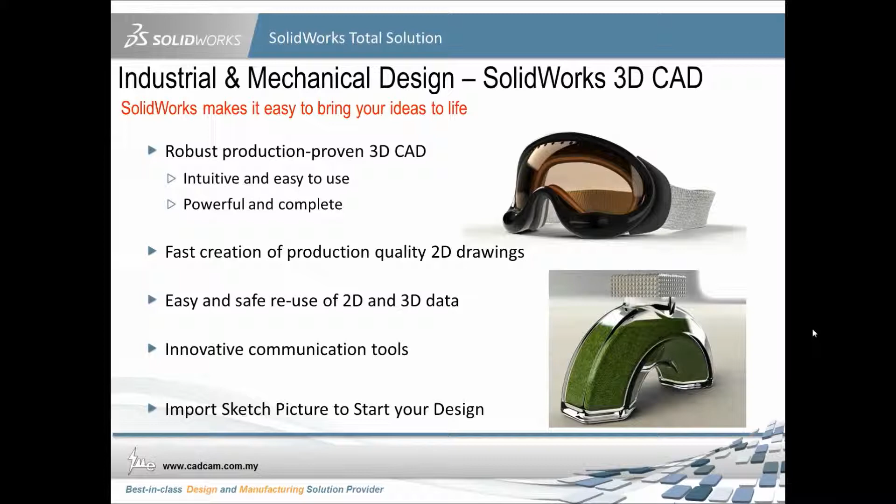Here are a few slides to show you what kind of capabilities Solidworks solutions in 3D modeling can help you with. First of all, interoperability. It enables you to read in sketch pictures like JPEGs and other kinds of file formats, and it's also compatible with Adobe Illustrator. You can import these pictures into the Solidworks interface and start doing surface modeling or even solid modeling.

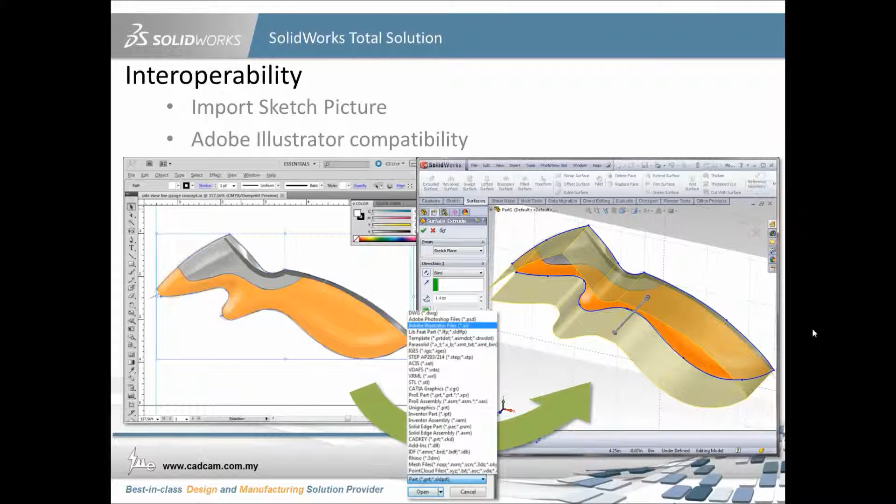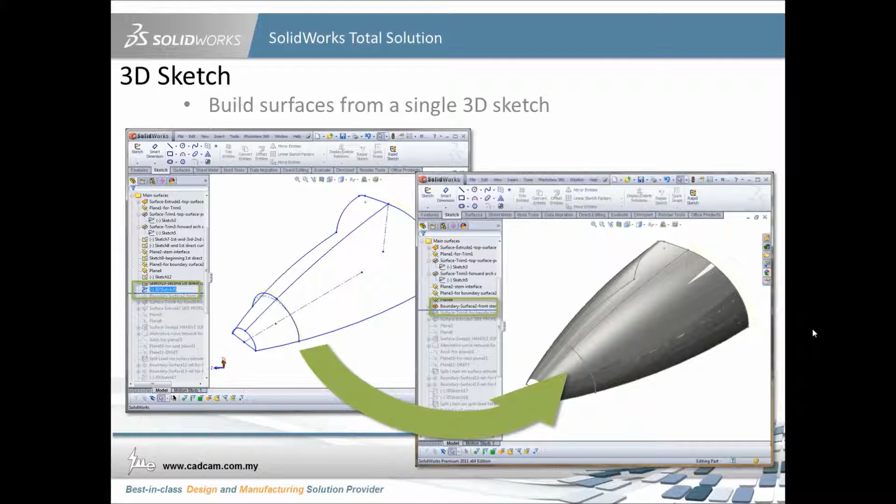If let's say you don't have sketch pictures, you can also build up your own sketches, and even use 3D sketching to build the surface from a single sketch.

SolidWorks software also includes curvature checking tools, which are curve continuity checking tools, to ensure all your surfacing has C2 matching on the surface features.

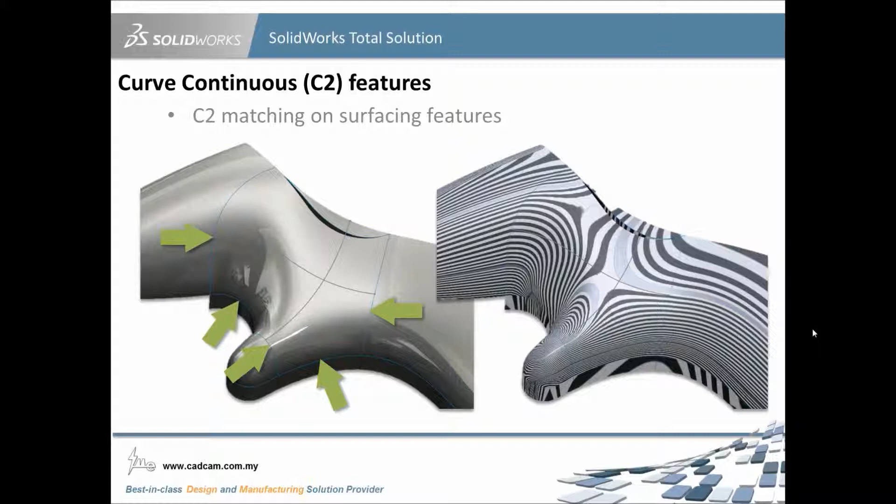Here you are with an extensive set of advanced modeling tools and features to produce very complex or even nice free-forming surfaces in your consumer products.

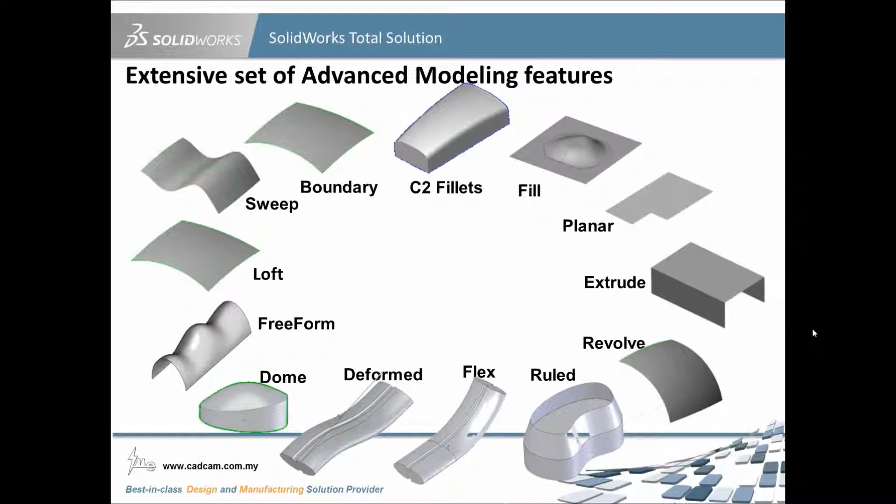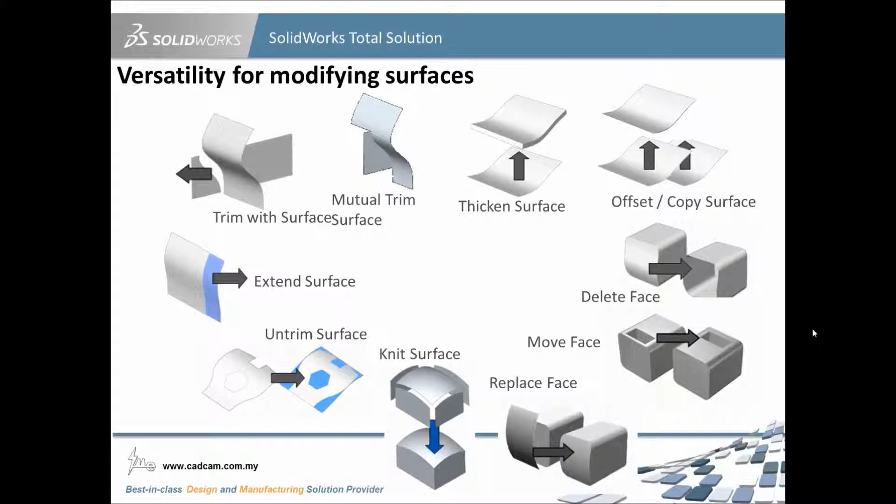Apart from that, the surfacing can also be modified by versatile surface tools, whereby you can import existing models from solid modeling and modify them to become a new product.

SolidWorks enables hybrid solid and surface modeling. You have the capabilities and abilities to form a surface body from a solid body and back to solid bodies in the same part file.

You don't require different kinds of interfaces or 3D platforms to generate the designs. This picture shows one of the samples where you can create model designs from a solid, delete a face to make it a surface, form another new surface, and knit all the surfaces back into solids.

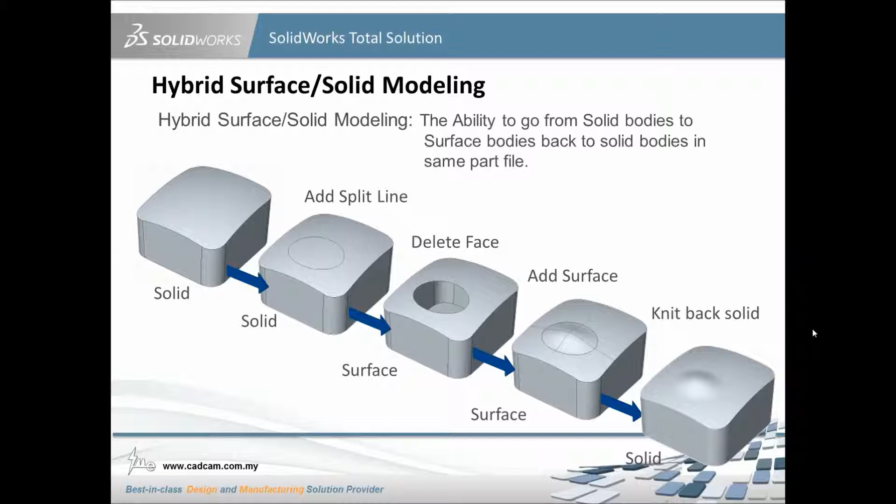By using multi-body and master bodies, SolidWorks offers you an environment to generate world-class hybrid modeling tools, making your design more flexible so you can work seamlessly between surfaces and solids.

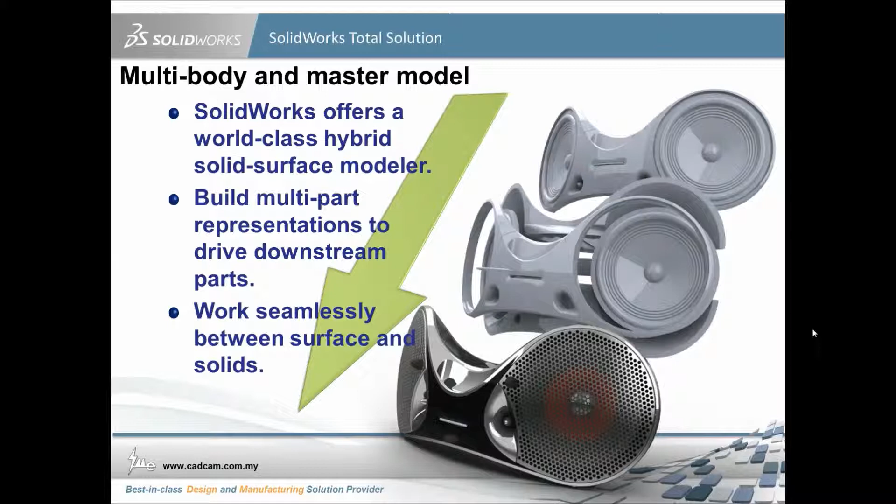You can even render your products to make them look like real-time realistic materials.

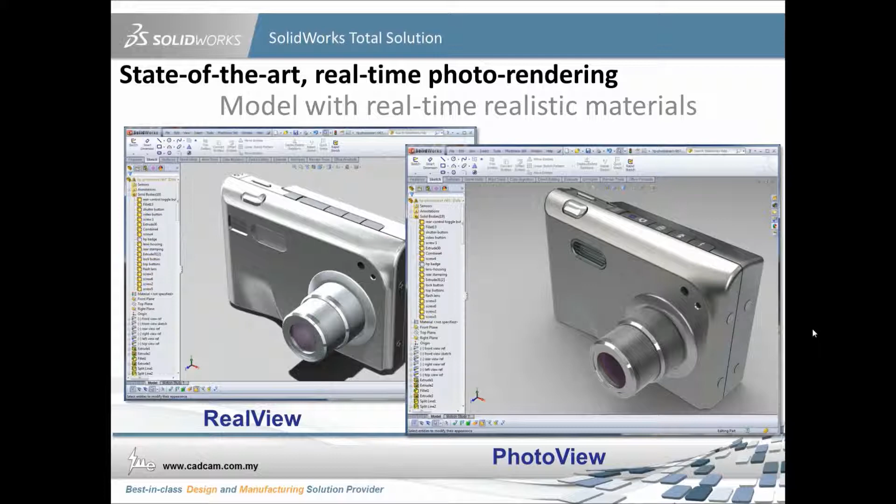Apart from 3D modeling, SolidWorks is also able to add simulation tools to do design validations. We want to make sure our first design is the best design.

The simulation tools enable designers and engineers to learn and use them to generate validations on our products, such as stress, pressure analysis, drop tests, fatigue, and non-linear analysis.

It can also use plastic injection analysis, SolidWorks Plastics, to check filling times, pressures, or detect possible risks of defects during the plastic injection process.

SolidWorks is also a pioneer in sustainability design, using life cycle assessment to check our products and how they affect our environment.

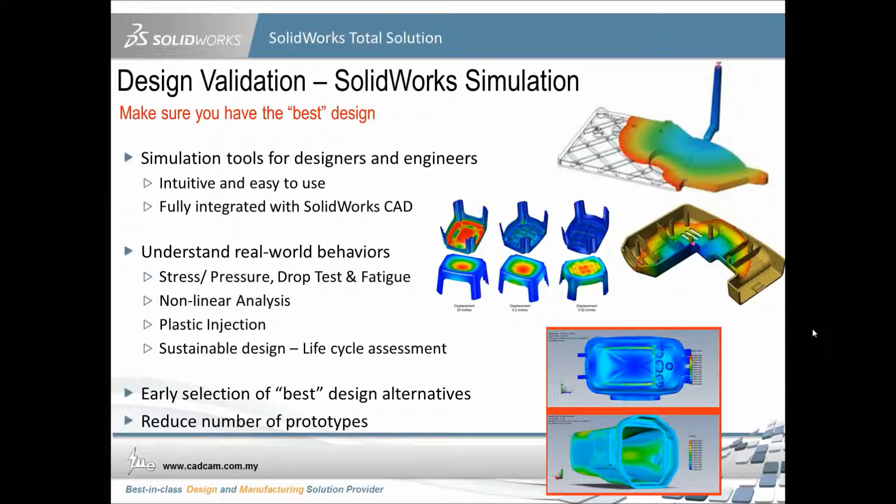We want to make early decisions to check design alternatives. It helps us reduce the number of prototypes, and it helps our company save costs.

Improving our communication from design to manufacturing is very important by using certain tools, especially when we have a language barrier with our shop floor workers, or geographical obstacles with our customers or suppliers.

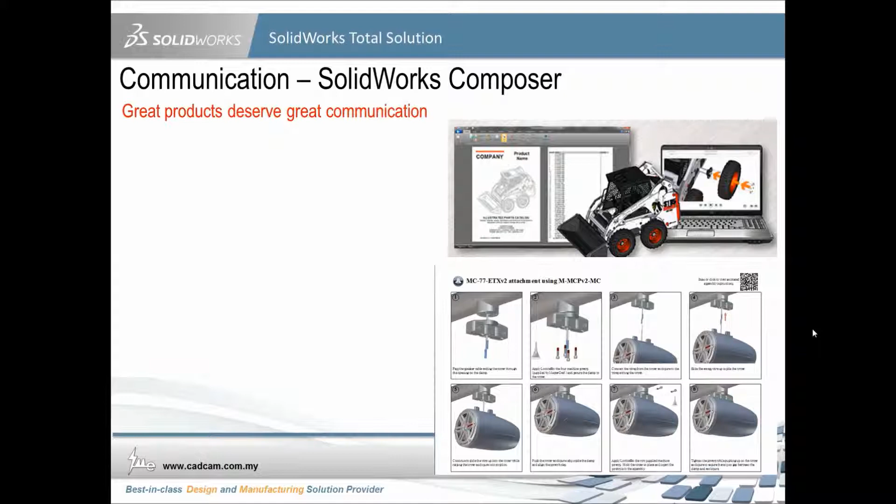SolidWorks Composer is a tool to help you create great product communications, such as technical documentation and marketing collaterals, with very stunning graphical content for all these technical communications.

You can reuse all the SolidWorks 3D design data to generate these technical documentations. It can be used by non-CAD users; it's not necessary that you have an engineering background.

It eliminates the need to redraw or take photographs. It saves your time by starting technical communication earlier and improves the quality of product deliverables.

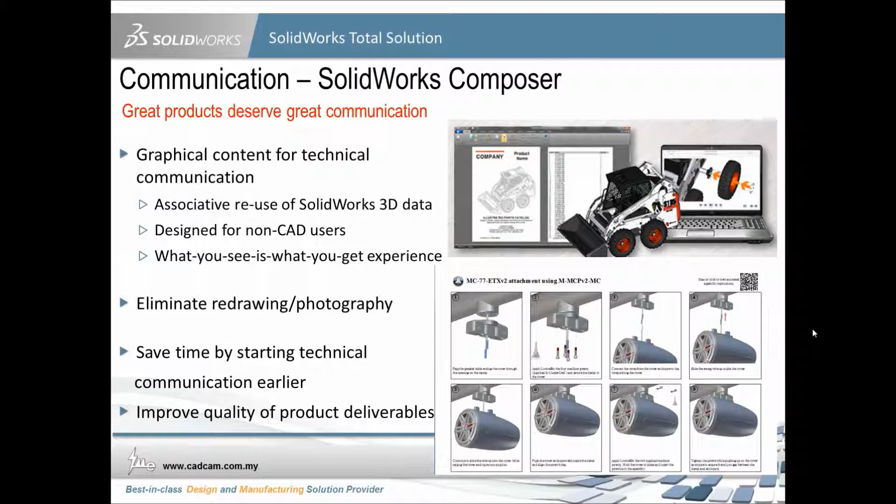This is a sample of the software showing how you reuse SolidWorks 3D content data, read it into SolidWorks Composer, and generate stunning graphics, which you can output as videos, 2D PDFs, images, and so on.

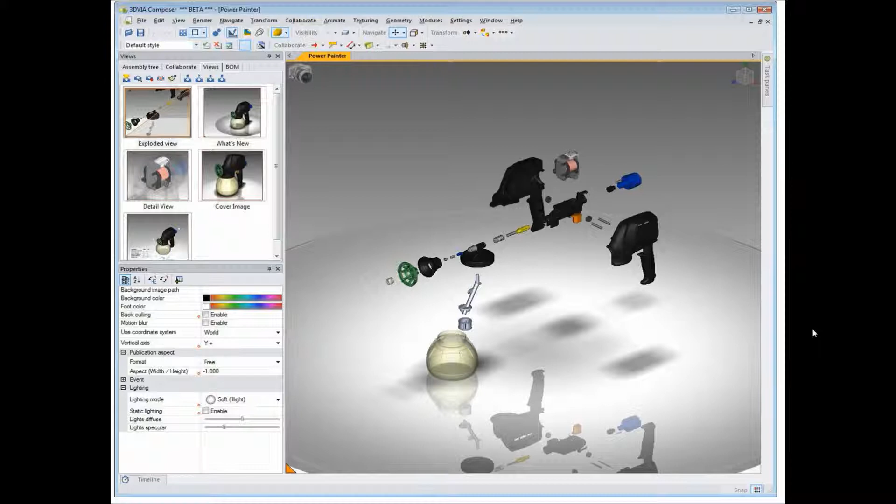With all kinds of data in your hands, from design to analysis, and even generating technical documentation, managing them is one of the challenges as well, because we want to make sure the right data goes to the right person at the right time.

It's easy to use because it's integrated with Windows Explorer. It helps you improve the process and communication through digital approval workflows.

Once you have the database, it helps you have fast searching capabilities for design reuse purposes and fast reporting. Last but not least, it can help your team grow faster and make sure there are no errors by using revision and history controls.

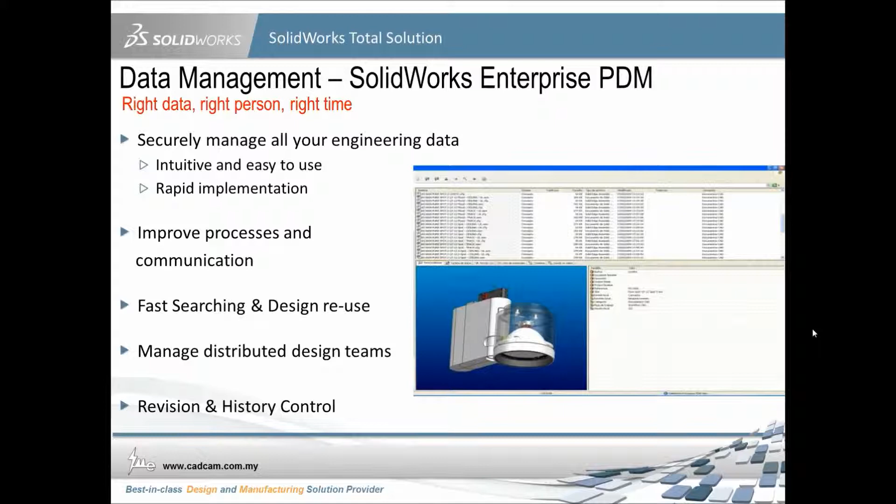Let's have a look at these videos to understand more how SolidWorks can help you in design.

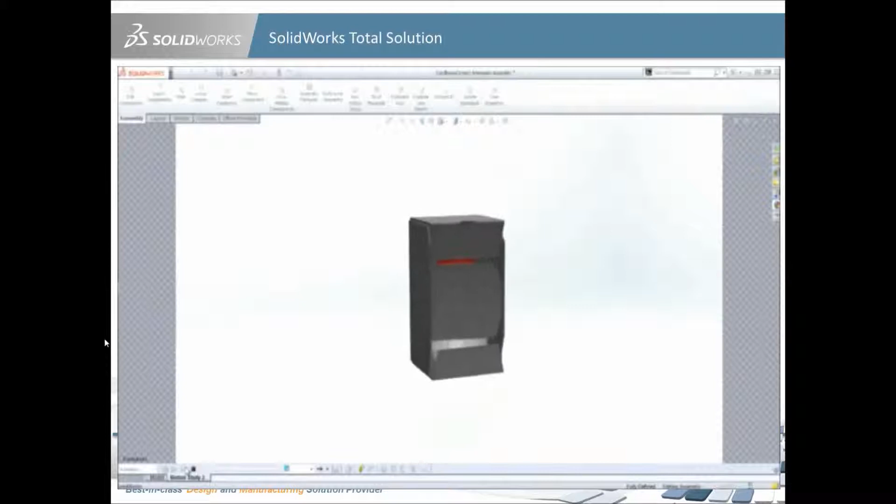SolidWorks lets you more easily sell your product vision to your clients by visually presenting your designs earlier in the design process. Show your clients how it will look and how it will work. This gives your customer confidence in the finished product well before any manufacturing takes place.

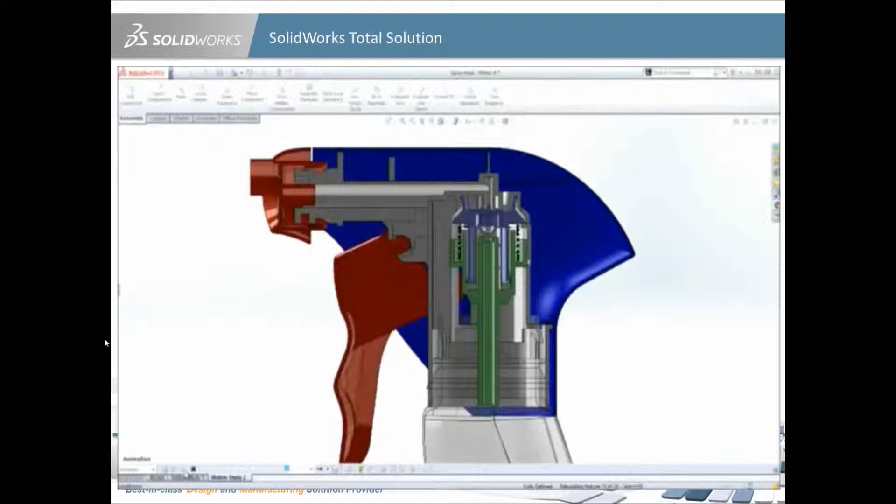Additionally, early design visualization minimizes the effects of consumer-driven design changes on costs and timeframes. SolidWorks empowers you not only to show your products in their best light, but also to ensure that parts fit together the first time. Packaging designs typically start with concept sketches.

SolidWorks enables you to reuse these sketches, quickly capture designs, and turn them into 3D models in no time at all. Design changes are effortless and instantaneous when you use SolidWorks, so you can deliver the final product faster.

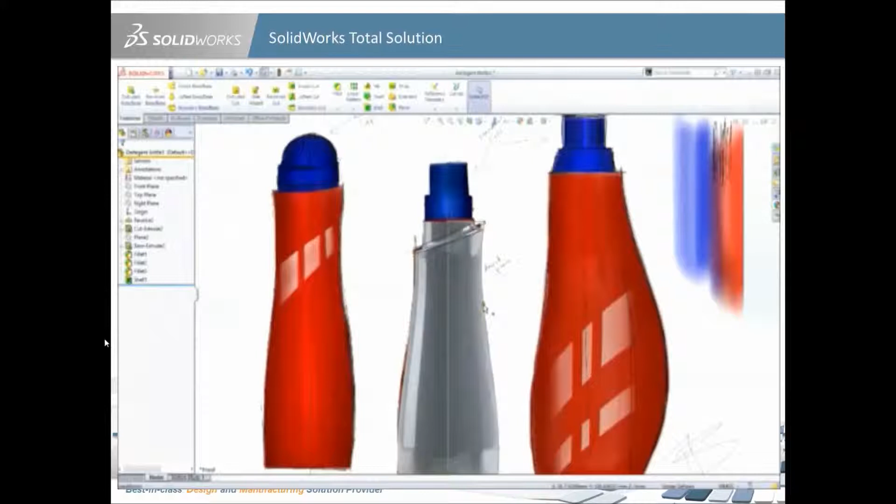The shapes and surfaces of consumer packaged goods contribute significantly to buyer appeal. For more complex shapes, SolidWorks provides high-end surfacing and shape creation capabilities that are as easy to use as they are sophisticated.

Tools such as Loft and Sweep handle most shape creation. But for more complex freeform styling, SolidWorks lets you simply push and pull surfaces to achieve the shapes you're looking for.

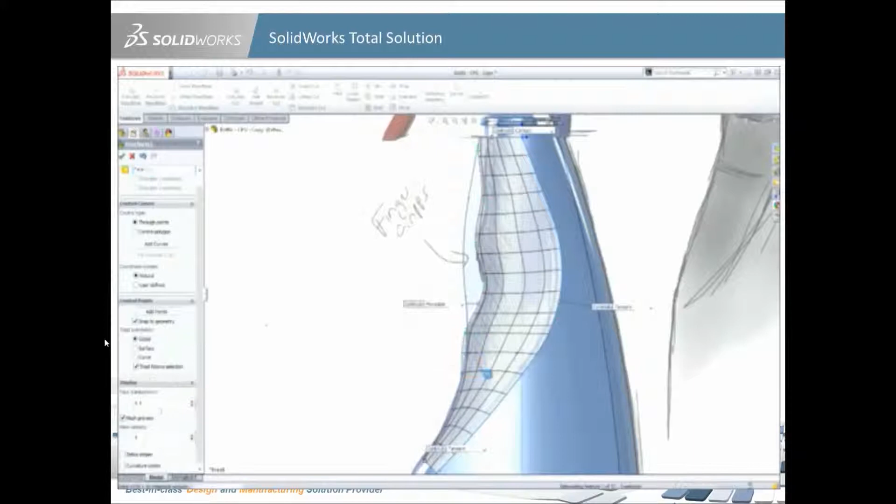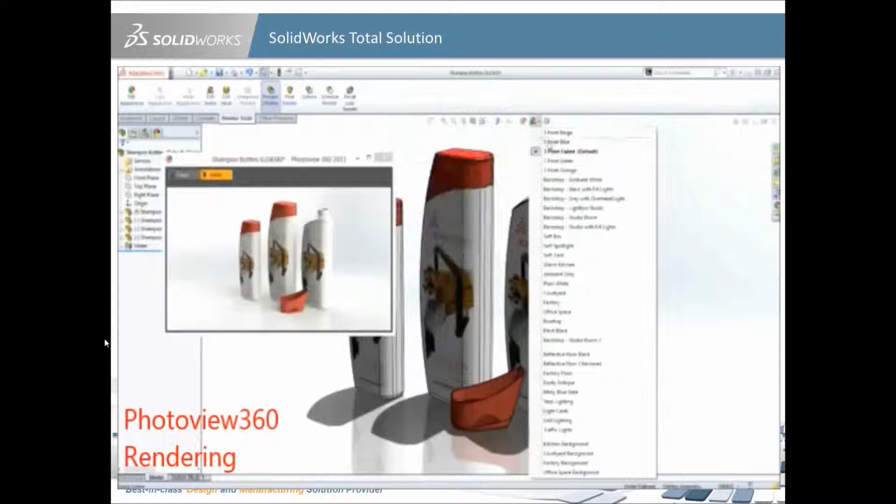Creating photorealistic images from SolidWorks models shows your clients how your products will look from early on in the design process and helps you sell your product concepts. Adding colors and textures, product labels, and environments is as simple as drag and drop. SolidWorks has powerful, easy-to-use rendering tools that ensure all users can create stunning, realistic images in just minutes.

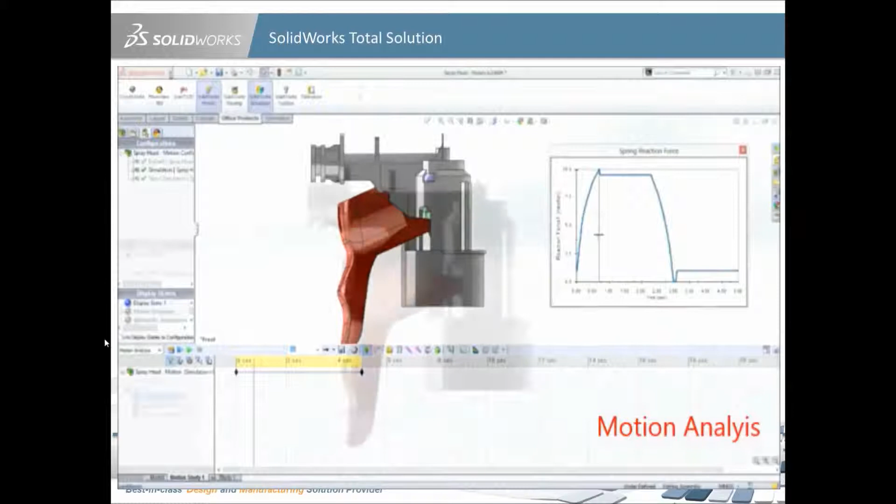While it's key to design products that function as required, you also want your design to align with the client's spec for weight, cost, lifespan, and environmental impact. SolidWorks enables you to test your products in real-life situations, providing vital feedback and helping you make upfront design and materials decisions.

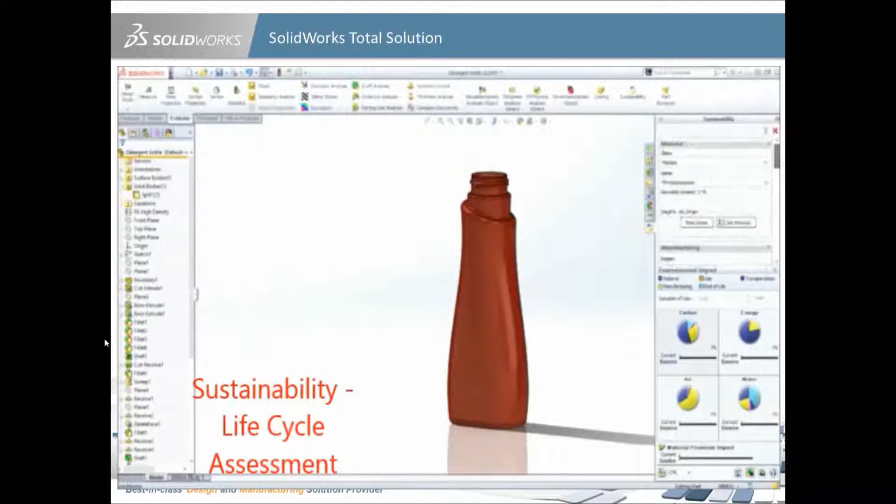Whether it's changing how your product is transported or changing its materials, reducing environmental impact by a small amount can have a huge effect on large volume products. SolidWorks Sustainability provides instant feedback so you can understand the impact of your product on the environment, and also calculates financial impact to ensure you're making design choices with confidence.

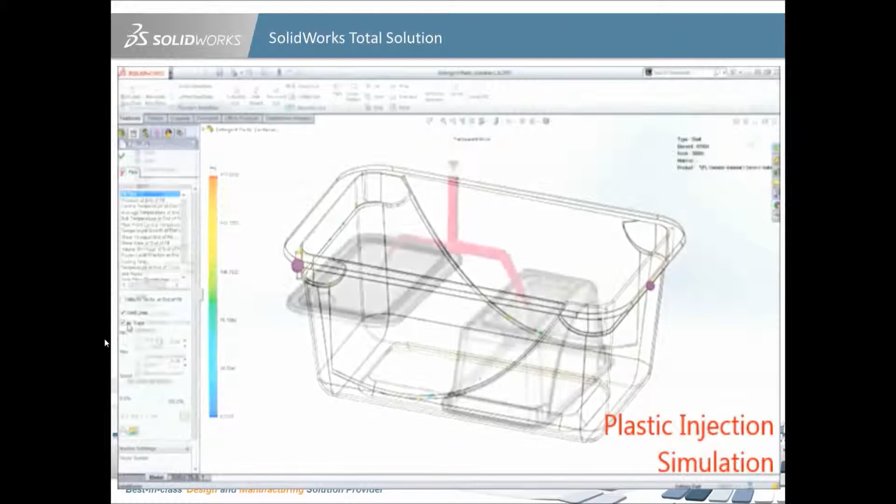For injection molded parts, SolidWorks Plastics makes it easy to identify and address potential manufacturing defects such as weld lines, air traps, and sink marks. Automated tools such as runner balancing empower you to improve the part or mold design, saving resources, time, and money.

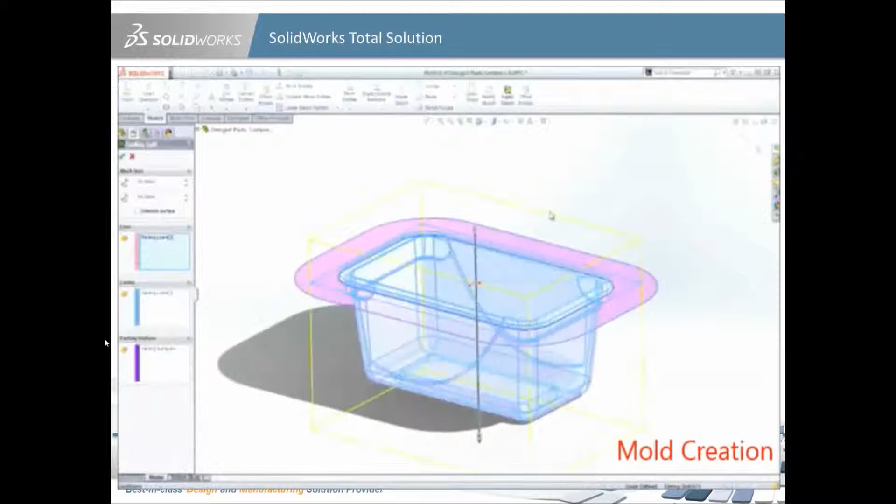Using SolidWorks, you can also test other manufacturing considerations. Draft, thickness, and undercut analysis ensure parts can be ejected from molds and help prevent costly side cores or specialist tooling. SolidWorks also automates the mold design process, automatically creating core and cavity geometry direct from the part.

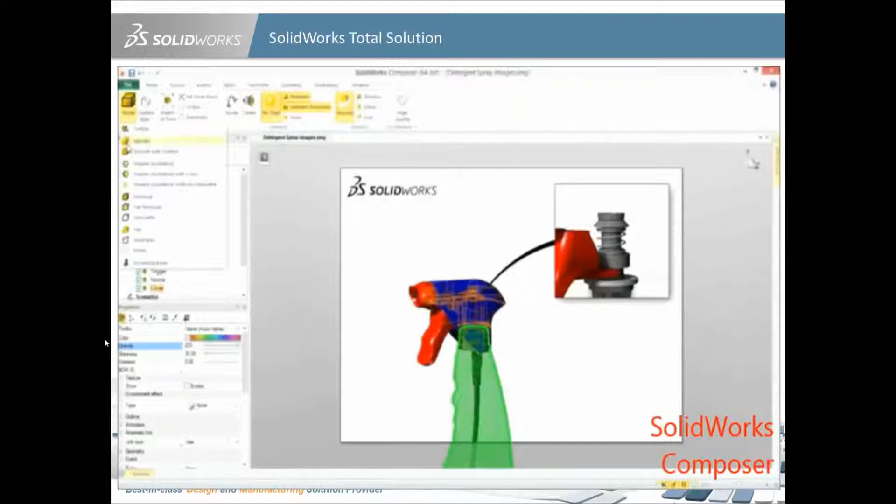Product communication, such as user manuals and assembly instructions, are often afterthoughts, written when a product is ready for manufacture. Last-minute changes are costly to implement and can delay product release. With SolidWorks Composer, documentation can be started earlier in the design. Content is created directly from the 3D model, and any design changes are updated automatically.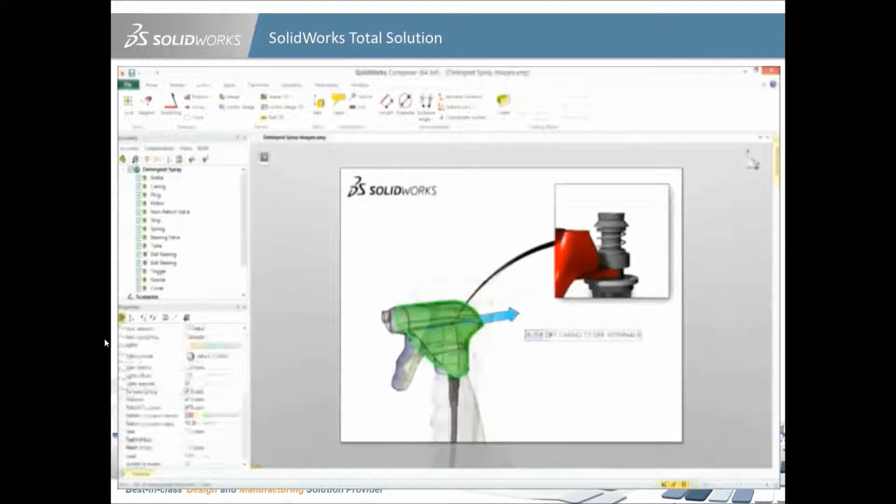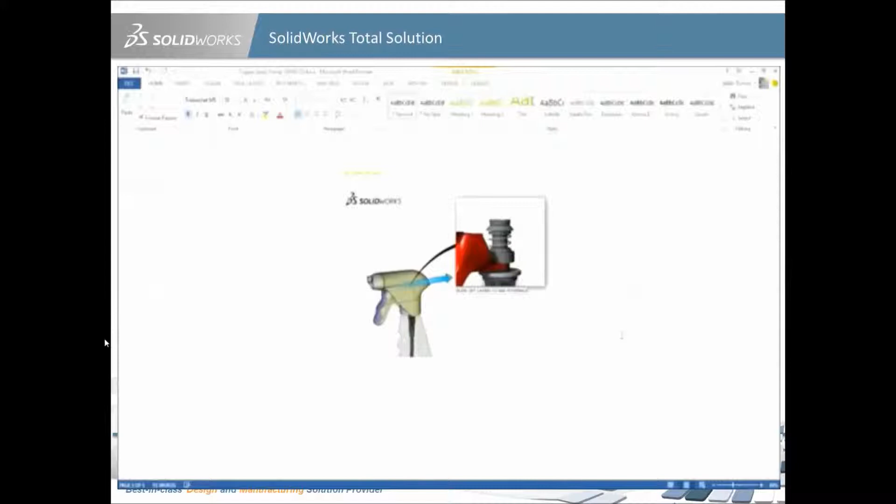Illustrations are quick to create with tools tailored for technical communication, such as detail views, rendering styles, arrows, and callouts, to name just a few. It's simple to incorporate your illustrations into the publishing tool of your choice, so content creation is seamless. You can also easily create 3D interactive content that adds extra value to your offerings and differentiates your products from the competition.

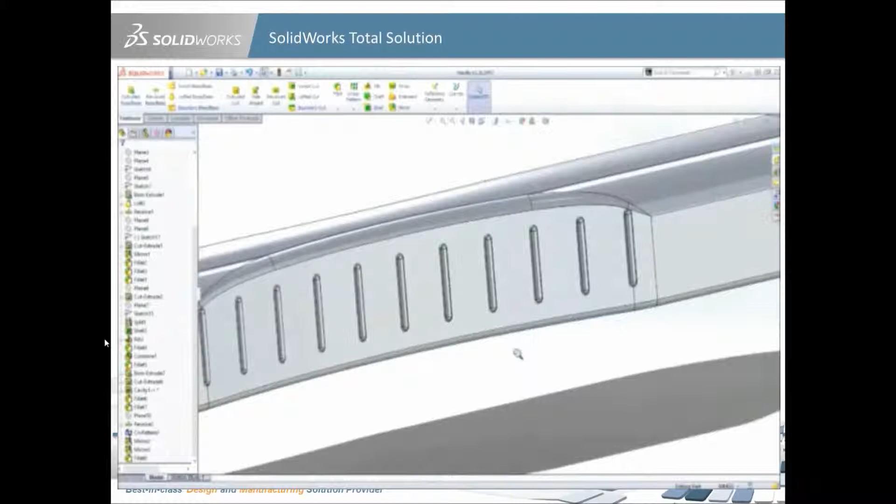Testing many design iterations early in the design process can save you time, reduce rework, and improve product quality. With SolidWorks Enterprise PDM, changes to your design appear in all deliverables such as drawings, renderings, simulation, and technical communications. This ensures that all components of the design are working from one common definition. As a result, errors are all but eliminated.

Fully configurable to your own company standards and compliant to many industry standards, SolidWorks Enterprise PDM manages all design files and ensures appropriate workflows and procedures are followed. All of the design stages, including approvals and change orders, can be managed and communicated throughout the company. This keeps the entire team, no matter where they're located, up to date on any changes to the design.

Many companies in the consumer packaged goods industry rely on SolidWorks 3D CAD solutions to simplify design tasks and help them create great products at low cost without sacrificing quality or performance. To learn more about SolidWorks products, contact your SolidWorks reseller or browse this site further.

Hope you can learn more within this 22 minute presentation and the videos regarding how SolidWorks solutions add value to your consumer products industries.

Before we end our presentation and webinar session today, let me share with you some of our customers utilizing SolidWorks solutions to help them in their product development process, such as Hosiden Electronics Sendirian Berhad, that generate electrical consumer products, Panasonic, that design fans and air cons, and Faber-Castell, where you might not even know your pen was actually designed using SolidWorks.